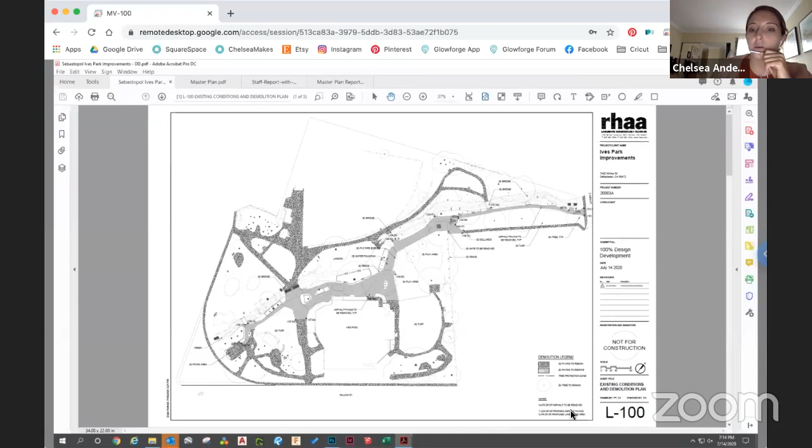Moving forward, the next plans you'll see have about 11,000 square feet of proposed asphalt paving, which is what is in the park currently and is what we would be proposing moving forward. And about a little over 3,000 new square feet of landscape area.

Okay, so in this plan, you'll see there is a dark gray line that winds its way all the way from High Street to the picnic area. And we are following ADA and maintaining a less than 5% slope in all areas. I don't think we get anywhere near that, which is great. So we're able to connect to the parking lot here and keep moving, maintaining most of the grades around the existing play area and building, providing additional planting area, not necessarily to be planted, but at least just to have mulch or some other furnishing to be decided by the parks, just to eliminate some of that excess paving and make the livable space around the trees a little bit better, making space under the drip line so that those trees are naturally watering themselves.

Okay, so getting into the entrance to High Street, we are doing a slight meander, maintaining a less than 5% slope. You've got an 8-foot wide walk, which meets ADA requirements, and avoiding all of the existing trees. We have maintained all of the connections to the existing bridges.

As you get through this first channel, there is an existing fence, and I think our plan is to propose removing this gate, potentially for removable bollards, but this is something we'd want to look at during a reconnaissance visit after things have lightened up. We're maintaining the grades along the existing play area so there are no required changes to raising or lowering, connecting to the existing bridges.

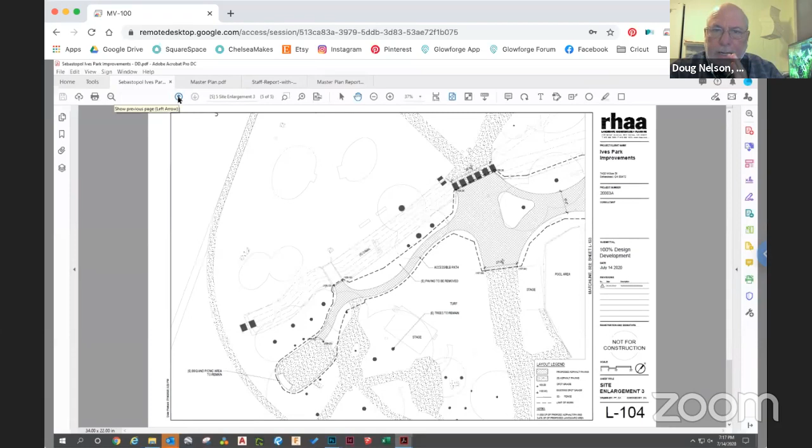The only thing I wanted to note is at the High Street end, Chelsea, if you could go back to that end. One of the other things, I believe, Kari, correct me here, but is this the area where you're also looking at a sculpture garden?

Yes, that's correct. We've moved the path over, in this case to the north or northwest, to leave as much of that area as possible for that potential use.

So Chelsea, if I heard the numbers, we have about a 300 square foot reduction. Is that right in amount of paving? I think it's 3,500. Oh, 3,500. Yeah, 3,000 is what I was thinking. Off by 10 times. So, okay.

So that's one of the nice things. I think we were given the task of rationalizing where we need paving. There seemed to be more paving than is needed, so we were looking for opportunities to provide the accessible path of travel and yet remove paving where it's not needed.

Right, and I'll just make a note. Alan and I have been working with the Public Art Committee, and thank you for leaving it on the screen for a moment, on the sculpture garden, which will sort of be up between that paving and the line of the parking lot below, right where the hand is, and there won't be pathways through the art.

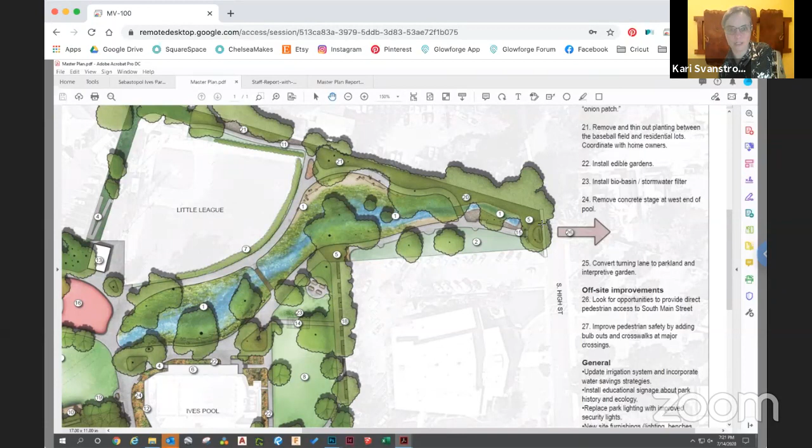Right, and we began this with a walkthrough with Chelsea and Doug at the site with Dante Deprete, the Public Works Superintendent. Chelsea, can you go to that one corner where the trucks come in at the corner of the parking lot, where number 5 is on this master plan?

So right now there's a lot of weird cross fencing at this location, and there's a couple of cross slopes, one where the pathway comes in past the parking lot, and then there's also an ADA space right at the corner of that parking lot for an accessible route into the park.

Those are a couple of the constraints RHAA is working on. Also, Public Works maintenance vehicles access the park through that particular location. What we'd like to do is eliminate some of the fencing based on Planning Commission's prior comments about the amount of fencing in the park, and also just from a visual standpoint of good park design. So that's something RHAA is going to be looking into as well.

It will probably still need some sort of movable bollard, because one of the things we want to do is try to eliminate non-city staff from accessing the park just because it's a convenient way to drive in for their picnic.

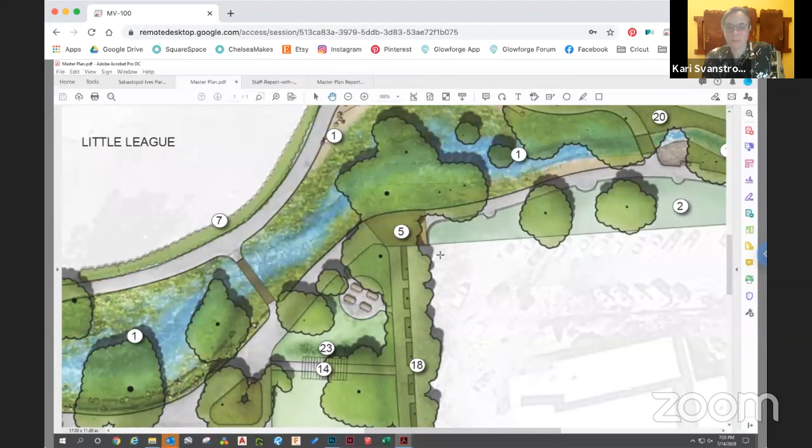All right, so we'll open it up to questions. I'll start with a couple here. One question I think you answered as far as vehicle access, it's kind of difficult to have a combination of pedestrian and vehicle access. So I think that's one of the challenges. And I'm wondering, I know it's probably an expense issue, as far as the black asphalt, is there other options available, or other material that could be used, now or in the future, to blend in more?

Yeah, that really just comes down to cost. There's definitely a lot of options, but Doug, you might have a better idea of the price differential.

Well, yeah, the options go into various kinds of stabilized decomposed granite, and concrete, both of which would be more expensive. The stabilized decomposed granite has many different products, some of which require more maintenance and are more difficult to maintain. I have to say, nobody likes asphalt, it's a petrochemical product, and if we had good alternatives, we would definitely use them. But unfortunately at this time there are not good alternatives that are as economical and as long-lasting as asphalt.

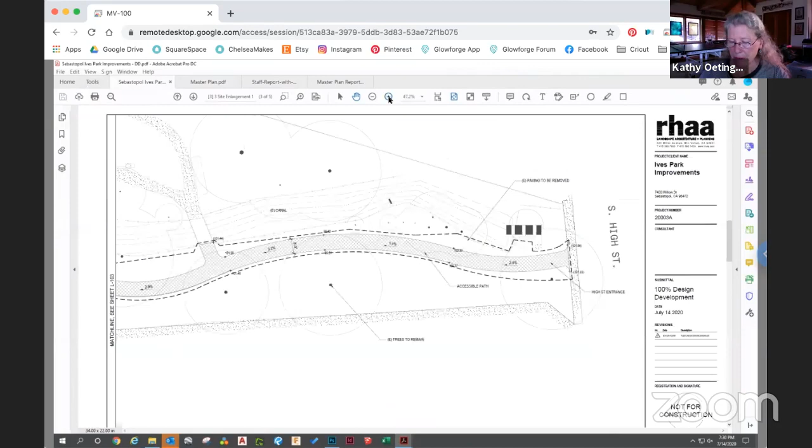I think one concern certainly is that there's a tendency to cut the corner as you're entering in from either direction. So if the path isn't wide enough as the half circle was, there may be issues with maintenance there unless there's landscaping to prevent people from cutting diagonally into the park.

And I think that the half circle plan solves that problem a little bit. So I am concerned that it's not a little wider or angled in each direction to avoid the cutting of the corner as people enter. So that's my comment there.

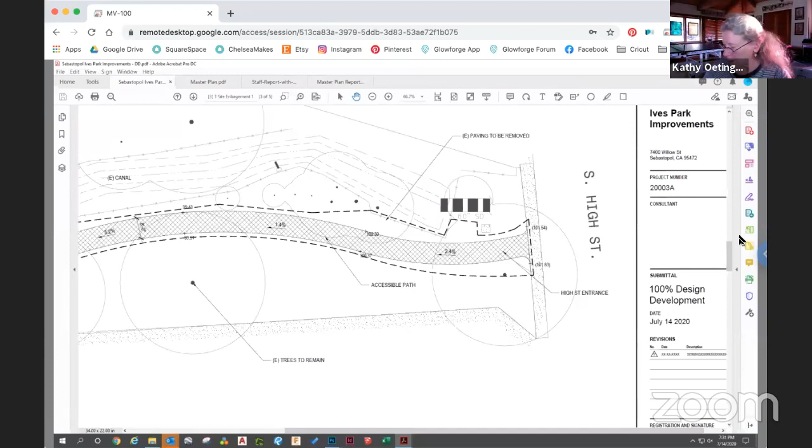Going back to what Paul Fritz was talking about by the northeast corner of the pool, I'm not really sure. I can see if you're coming around the pool from the south to the north and then turn left, it looks like there's some stairs there, and then the path that goes no place except what I call a bow tie corner on the left.

Is that where people would walk? Yeah, where your hand is going, then they come to this little point that isn't really paved, where it attaches to the asphalt. Perhaps you could address that maybe right now.

Yeah, I think this area is another area that unfortunately we don't have clear photos of, and something we'd want to take another look at once we visit on site. Whether or not the path—my assumption was that this was some sort of maintenance entrance, but you all, of course, know the park way better than we do. And if this is a path that goes nowhere, then we might propose removing it in favor of something that's more pedestrian friendly around the side here.

Yeah, my concern is that it comes to a point where it looks like asphalt and the original not removed concrete come together. So yeah, right there, that point seems like it, just making it more like a path would help. So, and then my third area was on the west corner.

I think it's the enlargement 3 that you were showing before, by the pad where—so if you're from the ADA pad and you're walking, I guess, northeast, I'm wondering how wide that path is. It looks narrower than the one at the entrance.

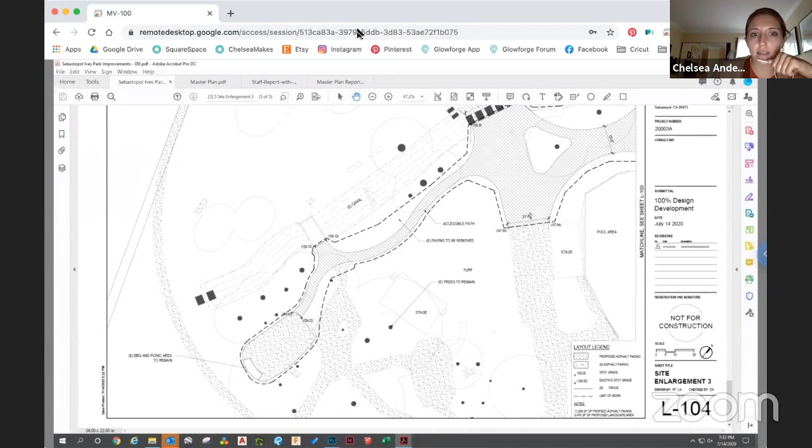That is a great question. It is likely at least 5 feet. I apologize that it's not labeled; that is an error on our part. No paths are smaller than 5 feet.

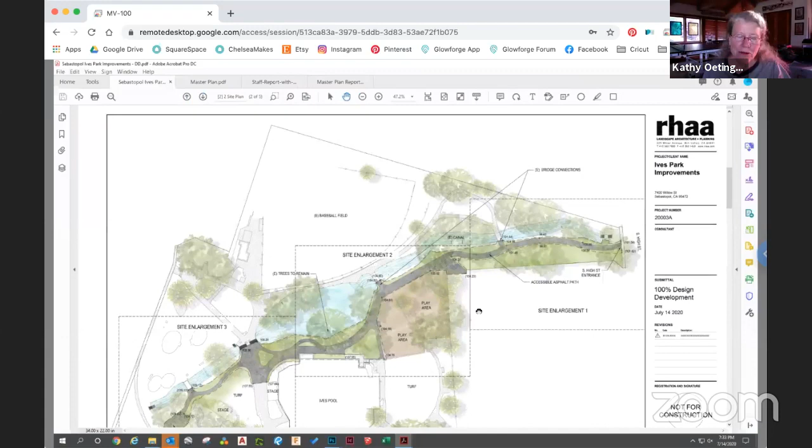I was counting the squares and thinking it might have been 4 feet, which I thought would be a little narrow, since when you're at an event there, a lot of people use that as a passageway in and out, and it can get quite crowded. But I think if it's 5 feet, that's sufficient for people to go single file in 2 directions.

I think it is the same for any of these other thinner paths. And if there's a desire to make those larger, just let us know. For now in the short term, because eventually there won't be a path there, I think as long as it's 5 feet, that will be fine.

Any other comments or questions?

I was just wondering, I didn't see really any plans for lights to accompany the new pathway, and I know that's definitely a concern that comes up a lot with residents. I've heard a lot of people talk about not feeling safe walking through the park at night because it's really dim. I also think lights would be really important, especially as we're moving toward creek naturalization, to make sure that, yes, we want to get rid of the fence, but if we do, we want to make sure nobody falls in either. So I would just like to hear if any lights have been considered.

I definitely would want to see, as soon as possible as we move forward with this, more photographs, because I think it's really hard to say what should be prioritized, especially as we're going into a bit of a budget crunch and we're not going to be able to realize everything in the master plan right away. Making those tough choices is going to require a clear understanding of where the most pressing safety concerns are and where we should be focusing our attention.

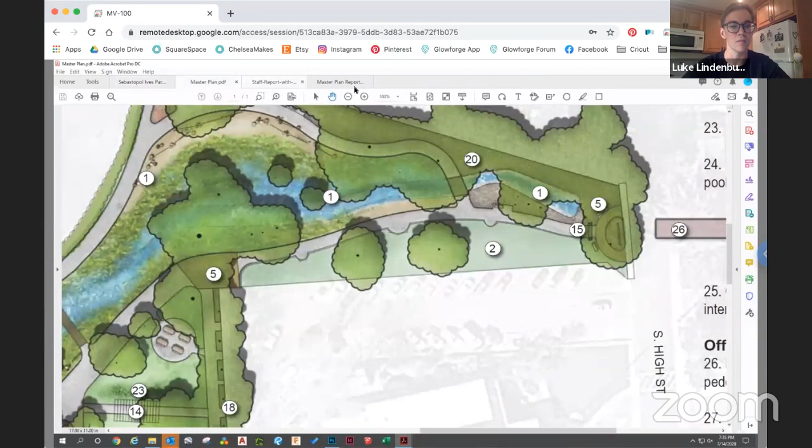The last thing I wanted to bring up is the broader issue of connectivity, especially as we're looking at what aspects of the master plan might be implemented. I think especially improvement number 25, converting the turning lane into parkland—if the pathway doesn't connect to that, that's definitely a consideration on the southwest corner there, which is not currently park.

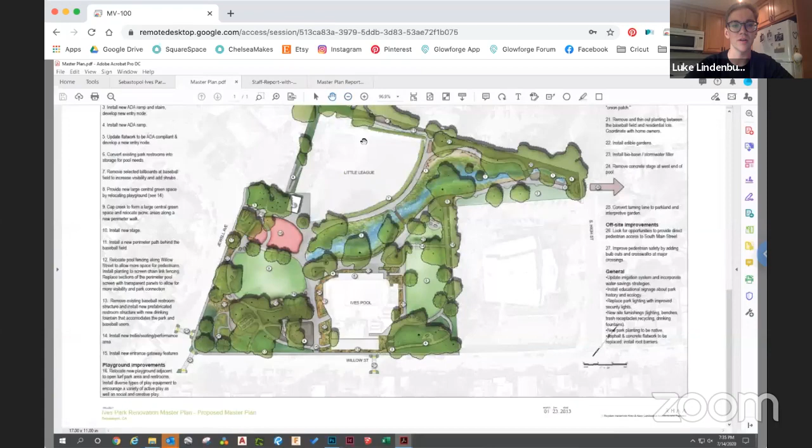My last point is I think we need to also be thinking about connectivity in the broader sense of how Ives connects to the rest of our town. So I don't know if we should necessarily be putting all our energy into the creek naturalization and that pathway being the grand entrance, when the Joe Rodota Trail more naturally spills out at Willow Street. That might be a more pressing area in terms of safety, especially with the condition of Willow Street on that last block before it hits 116, the western portion of 116. I think we should be looking at that as well.

So any responses you have to that, I would appreciate, but otherwise those are just some general concerns, and I appreciate the report.

Lighting unfortunately is not part of our scope. Kari, I don't know if you want to comment on the additional items.

Generally our parks are sort of a dawn-to-dusk kind of usage. I do know there are a couple of light standards up close to where the sculpture garden is. Along that pathway, on the north side, there are a couple of places where electrical conduits are included, where there used to be electrical. Dante, our public works superintendent, wants those maintained so that there could potentially be future lighting standards there.

I believe this is also being designed so that there are some chases underneath the pathway, going across it, that would accommodate some future use—Chelsea, I don't know, is it just irrigation, or will we have the ability to place some conduit under for irrigation as well as electrical, in case we want to future-proof it for future lighting? It's not in the budget right now.

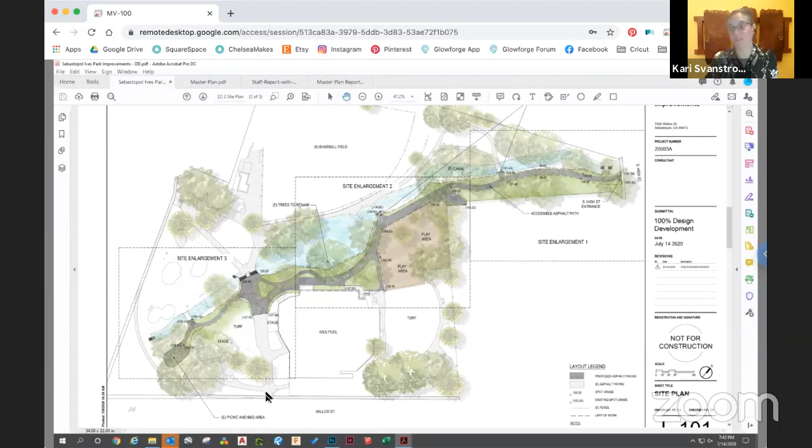Sure, thank you Doug. So this did start off as, hey, there's a section of pathway that isn't accessible that goes to ADA picnic tables, and there are some areas down in that southwest area that are degrading significantly to where they become trip hazards. Instead of just repaving it, we wanted to have the larger vision of doing something consistent with the master plan.

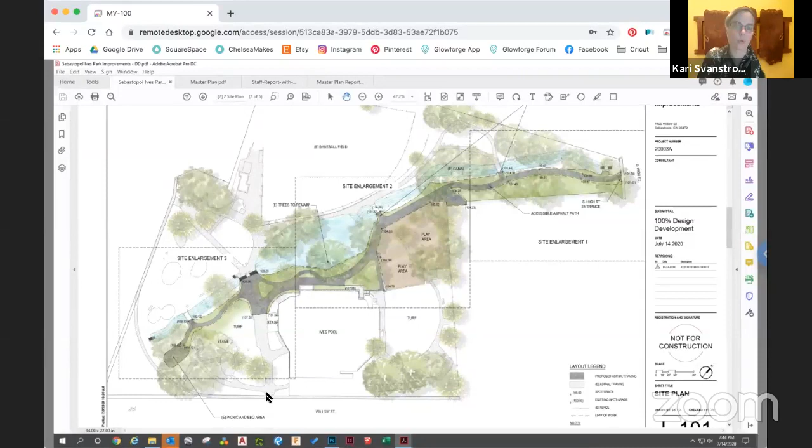But to address your question about that whole corner of the park, Chelsea, can you go to the master plan diagram? The larger diagram looks at that whole turn lane where number 25 is. That's actually where that right turn is, and there's that sort of weird island.

The larger vision of the master plan is to basically take over that turn lane and extend the park out to a corner, which, anytime you shorten crosswalks or make streets smaller with less to cross, that inherently makes it safer and easier for pedestrians of all kinds. We don't have that in our 5-year capital improvement plan right now.

It would be helpful to take a few moments after public comment, when we get into deliberations on this, to hear from commissioners. It's maybe a little off topic for RHAA, but it would still help me guide their work, even on this component, in terms of knowing if there are other pieces like that portion Luke just mentioned, or items you feel should be prioritized as we do the future planning.

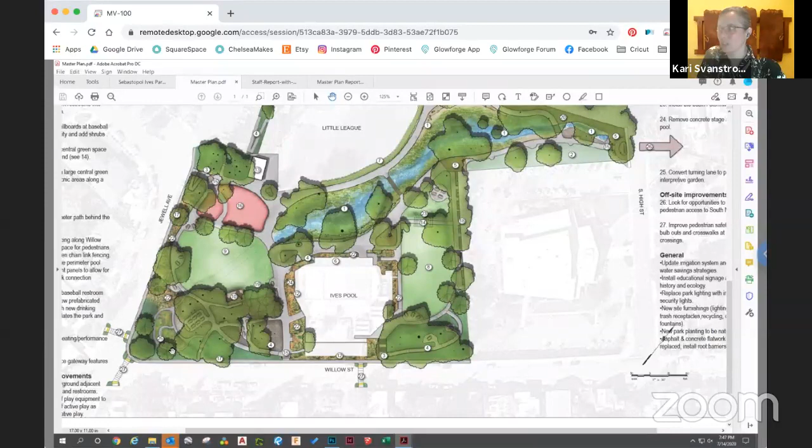they usually go in early morning-ish on weekdays when usage is fairly light, or after an event like the Apple Blossom or the Peacetown concerts, the next day, to do the cleanup.

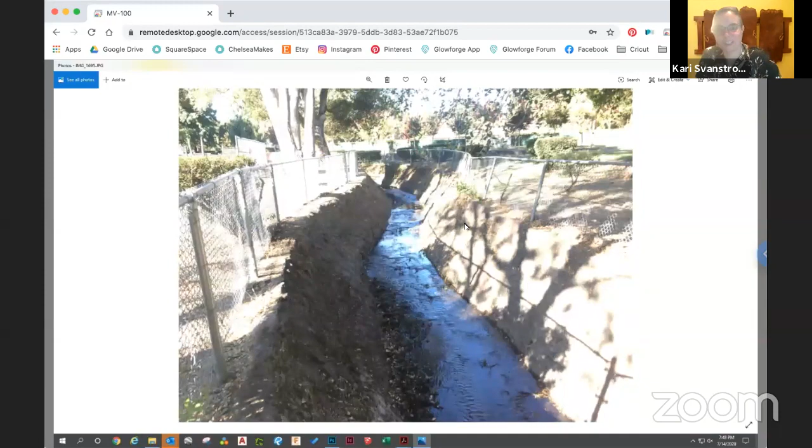The problem is that vehicle entry is not terribly secure, so it's really easy for anyone to drive in. We've had a lot of people who will just drive in because it's easy. So one of the things I'd like to make sure we do with this is get a— sorry, I'm getting distracted by the pictures a little bit.

Make sure we get a gate that is easy for Public Works to use but keeps other people out. That will help with the degradation of the asphalt, as Doug mentioned, but also help with park safety. You don't really want private vehicles driving on the same path as a pedestrian or bicycle might be using.

Yeah, and I think also number 15, the entrance from Willow Street, seems to be often used for events. You can enlarge that—right in there for drop-offs and that kind of thing. I think there's usually a chain or something across there, and some signage. So that's another one to take a look at.

If there's no other comments, I'm going to open it up for any public comment on any of this information we talked about.

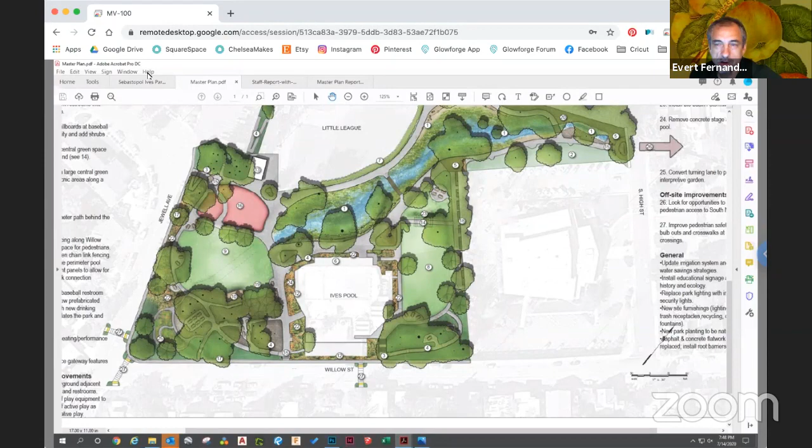Okay, doesn't seem like we do. So I'll bring it back in. Is there particular information or comments that you're looking for, Carrie, from the commission as far as moving forward, or is it just basically some of the comments we already made?

I think the type of comments you've been making have been helpful for me in terms of areas to look at more closely as the design moves forward. So if there are additional comments on the east entry, I think what Commissioner Oetinger noted is a good point, to make sure that if we do keep it, we look at where the natural pathways are and how it might align, whether it's a half moon, two pathways coming in from each angle, or a straight path.

But yeah, you are all avid park users, so just from your experience, how you think this works, your comments are great.

I support the half moon as well, if you're looking for feedback, just because I feel like with Ives Park in my mind, it's kind of like a city promenade park. And I feel like all the entrances could be a little bit more significant and welcoming for people walking through the park and strolling. In general, in Sebastopol, we need better park entrances.

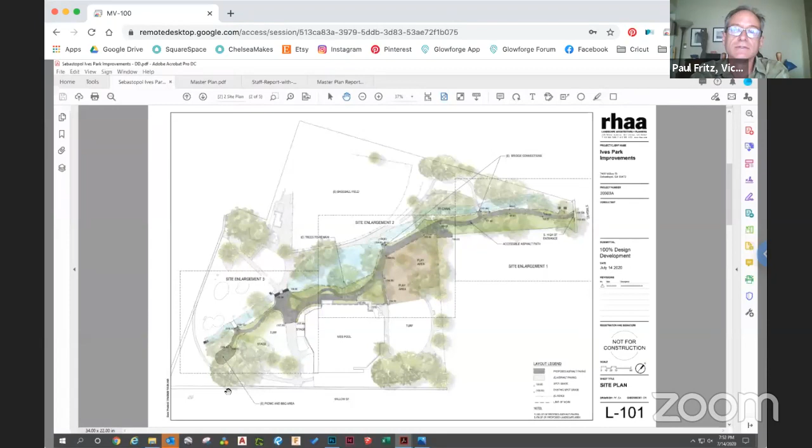Okay, I'd like to weigh in a little on the half moon idea. I'm not necessarily opposed to it, but I think there are going to be some physical limitations. If you go to that sheet, there's a tree right there, and I think there's a bit of a grade drop-off where that tree is, even though no grades are noted.

That tree is a bit higher than where you're showing the path. So I think it might be tricky to get a larger element in there. Maybe something that was also on the master plan, as a way of emphasizing or celebrating the entrance to the park, would be a trellis or some kind of structure over the pathway that draws your attention and highlights it. I just think it might be difficult to get that half moon design in there with the existing tree and the grades happening.

Commissioner Fritz, I think you also mentioned items 21 and 11, the north side of the Little League field, as far as having access to that. I'm not sure, yeah, right in there. Is that pavement there, or just a grass area? Now there's no path there. Okay, right, there's nothing there.

And just to weigh in on the corner of Willow and Jewell, personally I think it's a really important item for the city to consider funding in some capacity, even if it's just putting temporary concrete planters or something to block that intersection off, because it's a horrible intersection to cross. I used to walk my dog through there all the time, and there's just no safe way to get across. So even if it's just buying some large concrete planters for temporary purposes, it is a hazard, and I'm in favor of doing something as an intermediate step that would be cost effective but really improve the safety of that intersection, because it's pretty dicey.

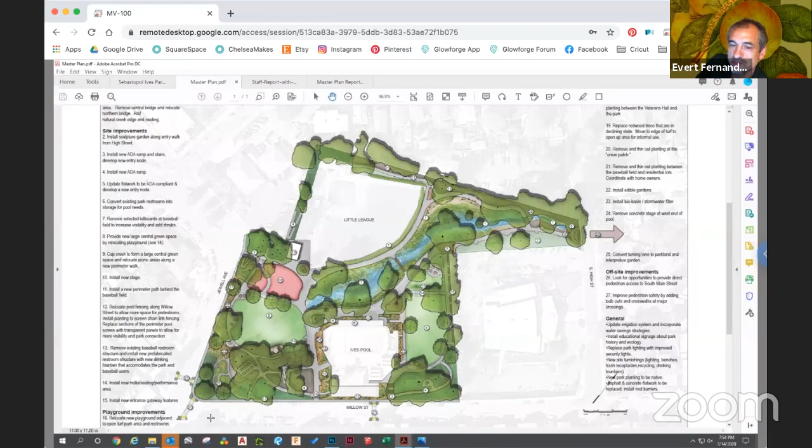Yeah, it is challenging because you're not really sure where the cars are coming from, there's like three or four different directions. And they can't see you very well, you're kind of stepping off that curb hoping someone sees you, because people really whip around that corner. That tree that's there could be integrated more, it's almost like it's just sitting there. Yeah, it could be used to integrate a little better. Yeah, it's very strange.

I have just one more comment on the master plan, it's area 6, which we've been looking at more closely on site enlargement 2 or 1 of 3. Those are currently restrooms right there, and I can't tell with the existing plan if the removal of paving would impact access to the restroom, because I think it's the women's room that's closest to that side.

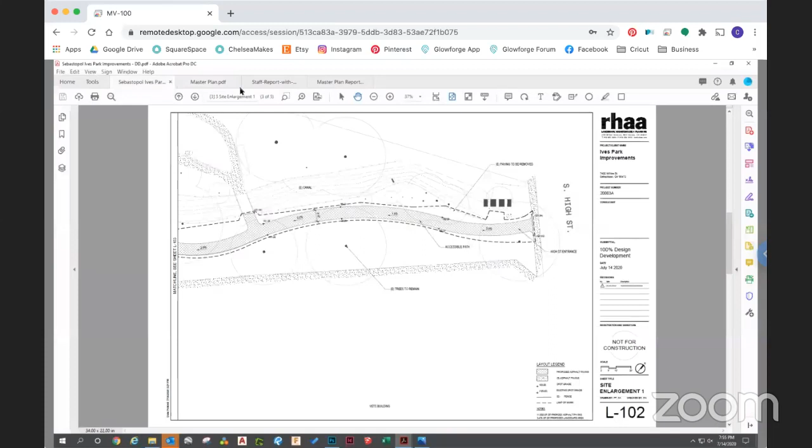So where you guys have planting, I think the restroom entrance is right around in there. There's a men's room on one side and ladies on the other. And there's a drinking fountain in that area as well, I believe.

So just thinking about access, especially ADA access to the bathrooms, that's my only comment. I think that's something we will field verify in the coming weeks. We definitely want to make sure there's access to the restrooms and water, we just want to know where they are. The doors, it kind of goes in and you go left or right. But anyway, that's something to consider.

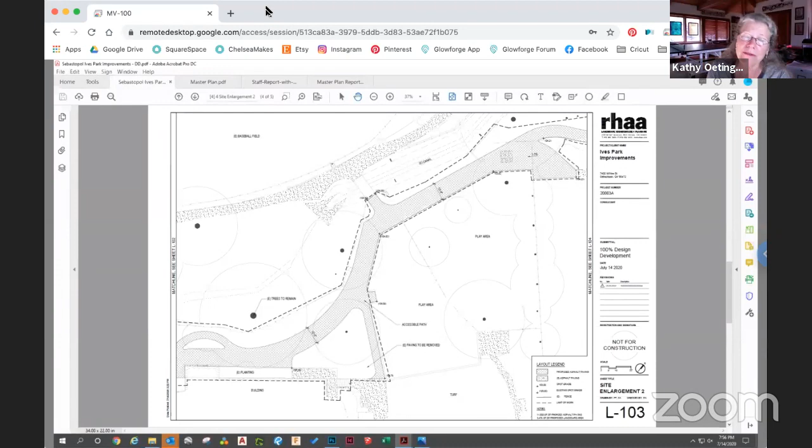I think the master plan has the bathrooms in another location eventually, over closer to where the ball fields are. I believe they're over there somewhere, they might be in that snack bar area. I'm not sure, but I remember reading about that. The bathrooms would be a problem, and when you're actually looking at the site, you'll see that people do tend to cluster and mill there in lines, so accommodating a lot of people there is important.

And then since I'm talking, going back to the east entrance, I agree that this semicircle isn't necessarily my preferred option. I just wanted to make sure that the angle is good enough that people aren't just cutting across landscaping. Maybe landscaping can avoid that, but just cutting across the grass seems useless.

Oh, one more thing, regarding the Willow and Jewell corner, the city did a fairly recent study, I can't remember how many years ago, and looked at the traffic situation, which seems really scary, but I don't think it had really bad marks, and cost and some options for that corner. So if anyone's interested, Kari could probably find that for them. But it was looked into very closely, and it is quite an expensive change since it doesn't have a lot of traffic hazard problems there.

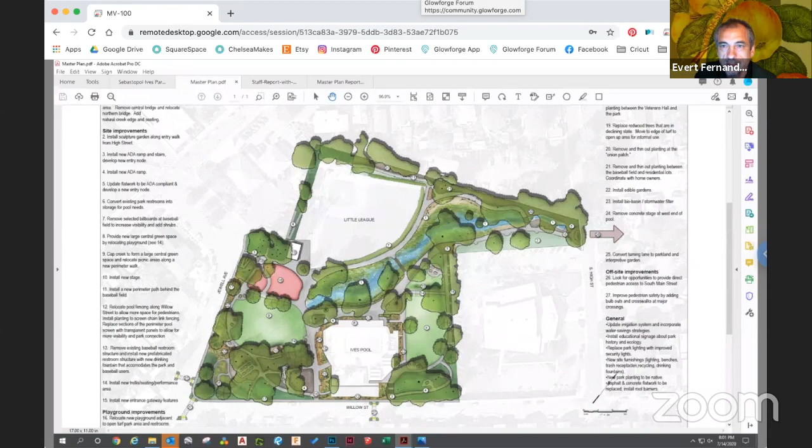All right, well, thank you to the presenters. Appreciate your time and input, and we'll just continue on with this plan that's taken a while, little by little, but at least we're moving in some direction. Thank you. Thanks so much. Thank you.